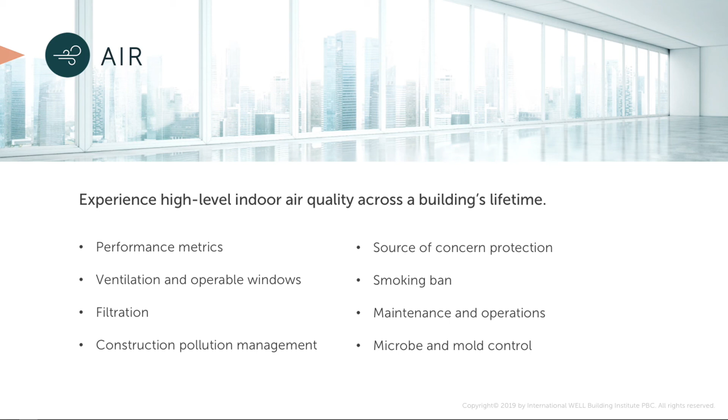Next up we have water. If you're all drinking your 2 to 3 litres of water a day, you want to make sure that your water is of an exceptional quality and that it's easily accessible as well.

And next up is nourishment. This is about encouraging healthier eating options. So WELL-certified projects are required to offer fruit and vegetables within the buildings. And so by removing cues and changing this environment, we're trying to support a change in behaviour.

It's been shown that increased availability of fresh fruit at work sites has been shown to improve fruit and vegetable consumption at work and at home, showing that individuals are taking these healthy habits home with them.

On to the next concept, which is light. Maximising daylight is something that WELL really places focus on. There have been a number of studies that show the positive effect of daylight on health and productivity, and the World Green Building Council reports that focused work increased by 15% for occupants who had window views.

Next up is movement. This aims to promote active living and try and move away from those sedentary habits that many of us have, by promoting movement within the building, providing active furnishings and spaces for physical activity.

Next up is thermal comfort. It is about optimal design and operations of the HVAC system, but it's also about catering for people's temperature preferences. So there's always someone in the office who wears a t-shirt regardless of the weather, right? And there'll be someone else at the other end of the office with a scarf and gloves and a hot water bottle. Not everyone feels comfortable at the same temperature, and an office that is too hot or too cold has shown to cause a drop in productivity of up to 9%.

Second last concept is the mind concept, and the overall goal here is to support and improve the cognitive and emotional health and well-being of those spending time in WELL spaces. It looks at HR policies, mental health promotion and support, sleep support, and help around substance misuse and quitting smoking.

Community is the final concept I'm going to cover today. It looks at topics such as new parent and mother support, providing employees time off to complete charity work, organising flu vaccinations, and also designing buildings to accessible design standards to ensure that everyone can use the building.

A bit more general information on WELL. WELL is global. It's designed to be used by any project. It's customizable and can be tailored to align with the project's wellness strategies and goals. And as we've seen, it has real impact.

Every WELL registered project is appointed a WELL coaching contact. They are the point of contact for the project throughout the whole certification process and are there on hand to help guide the project team through the entire process.

IWBI has developed crosswalks, which are intended to identify synergies between WELL and other green building standard systems to try and streamline efforts for projects who are pursuing more than one rating system. So if a point is achieved in one scheme, it may translate to a point achieved in another as well.

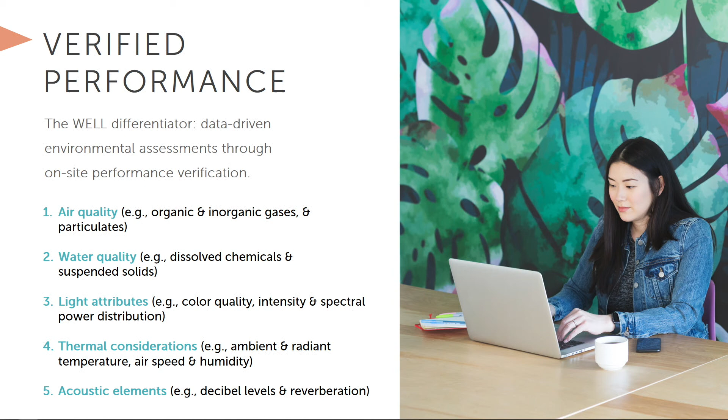Under the WELL version 2 pilot, we've opened up the market to include performance testing agents and organisations, some of which are listed here. They are trained by GBCI and can be contracted directly by the team working on the WELL project. We currently have 35 WELL performance testing organisations globally.

Now I'm going to hand you over to Coen and Marjon to talk more about the performance verification process and their experiences.

Hi everybody, this is Coen, my colleague, and my name is Marjon van Harten. We are from DGMR, a consultancy firm in the Netherlands, and we are WELL performance testing agents.

Today we would like to tell you more about our experience of last year. We followed the course in Paris, and from that day in February 2019 to now, we did 3 projects of WELL performance verification.

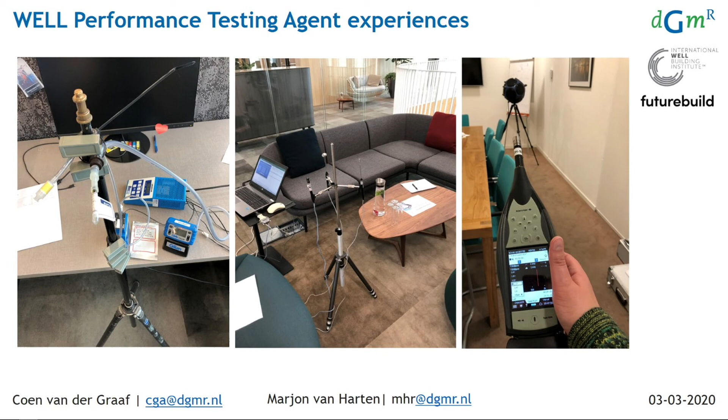Laura tells you more about the background of WELL, but for us at DGMR it's very important that we are a consultancy firm in health environment, and we believe a good environment is also good for people, because we spend more than 90% of our time indoors. Our experience is that there could be a lot of complaints about the healthy environment, and that it gives a lot of stress to people.

So that's why we believe in WELL, that when you design the building very well, it can influence the health and well-being of people. And as you can see, most of the influence factors are the physical and the social environments.

WELL gives a lot of themes to design the building very healthy, like air, water, nourishment, light, movement, thermal comfort, sound, materials, mind and community. Those are the themes, and for the design, every theme has different features, like 14 features for air, 7 for thermal comfort, and 5 for sound.

All those features consist of preconditions and optimizations. Preconditions are features you have to meet, and optimizations are features you can choose for. The good idea from WELL is that you have to choose from all the themes to get a label.

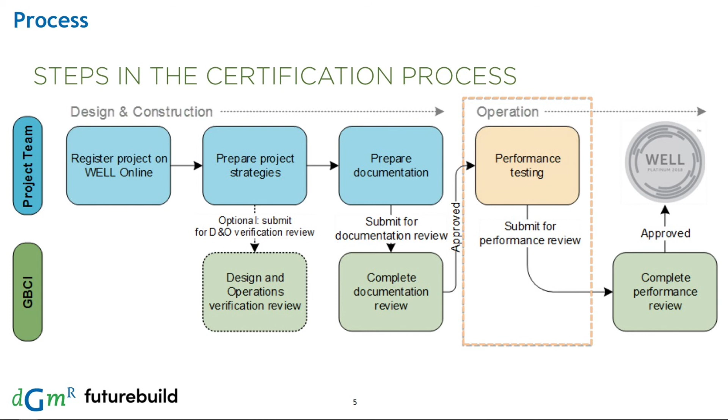In the next slide you see the process of the WELL certification by performance testing. First we review all the documents, and after that we make a plan for the performance testing on site. When we have done all the measurements and spot checks on site, we analyze the results, and when they are all approved, we send the documents to GBCI for a final check, and when they are approved, you get the certification.

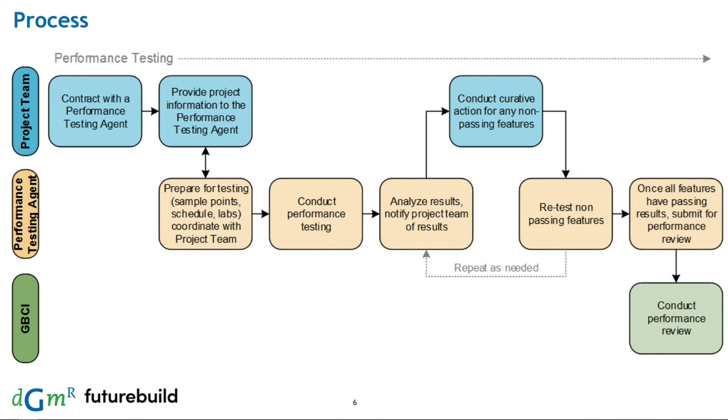But when we think the measurements do not approve the requirements, we go back to the development team, and we have to do retesting until we think the requirements will be met.

All the measurements and spot checks must be done according to the WELL performance verification guidebook, which specifies all measurement heights, accredited laboratories and testing protocols.

And now we're going to tell you what the benefits are of the performance testing and what you have to do.

For air, that's the first theme. You have to measure the air quality for different kinds of gases and particles in the air.

In the WELL Performance Guidebook, they describe how you have to measure, but also how many measurement positions are required. It depends on the project area, as shown in the table. If you have a very large project area, you have to take more measurements. But if your building has more floors, you also have to take more measurement positions.

We measure PM 2.5 and PM 10, carbon monoxide, ozone, nitrogen dioxides, formaldehyde, and 18 different VOCs. Some of them we can measure and analyze ourselves, and others we measure but have to send to an external qualified lab for analysis.

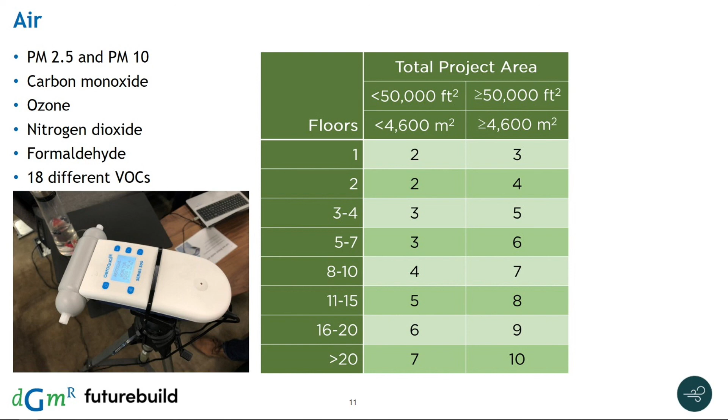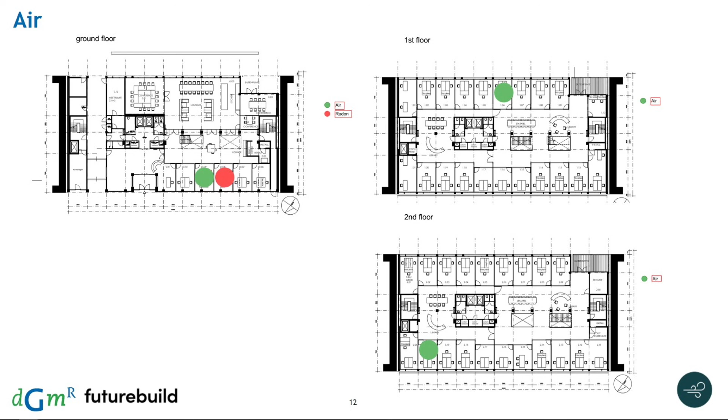GBCI would like to have control of the process, and that's why you have to take a lot of pictures of what we did. We have to photograph the height of the measurement equipment, the measurements from the calibration process, and where the measurement equipment is standing in the room or in the building.

Maybe you ask yourself why it's important to measure the air quality, because we don't see it. But there's a lot of research done in recent years about being healthy in relation to air quality.

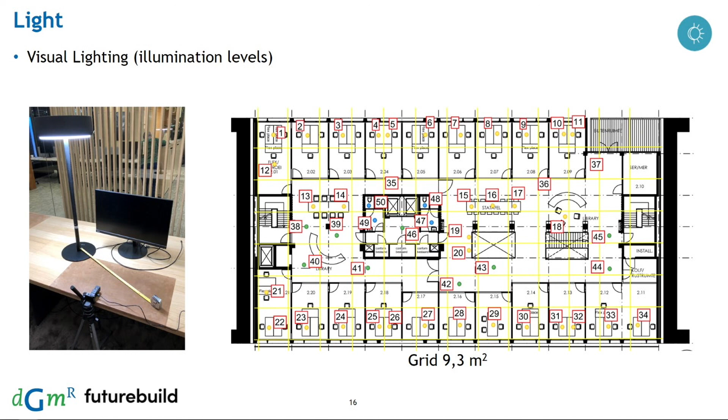For circadian light, that's the light on the vertical plane. So you measure the light that's coming into your eyes, and that is for the day and night rhythm of your life.

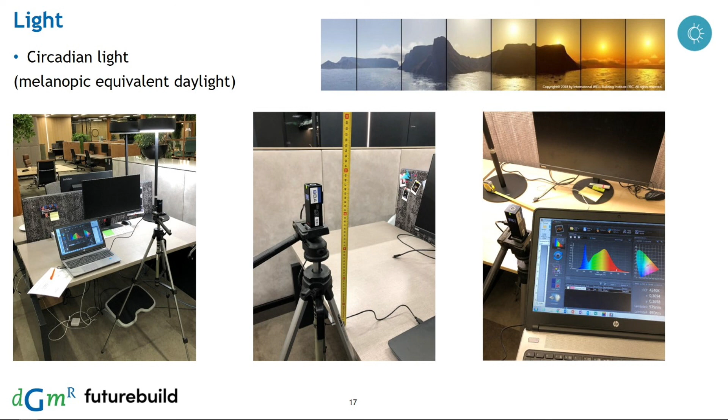For water, we do 35 analyses, which will be done by laboratories. Before we are going to test, we always let the water flow for 30 seconds.

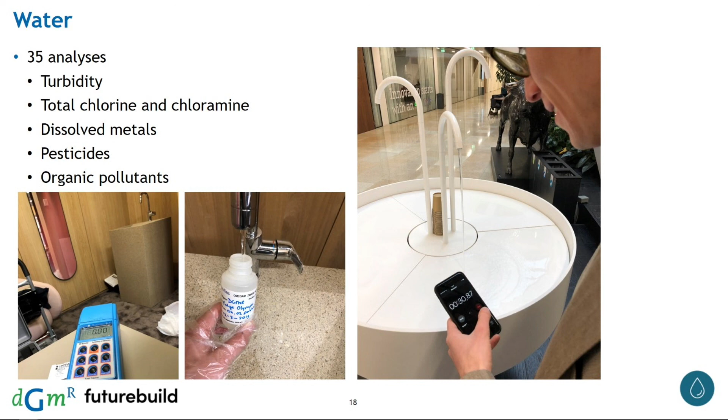In addition to that, we also do spot checks on site. We measure the dimension of the sinks and also the leak detection systems.

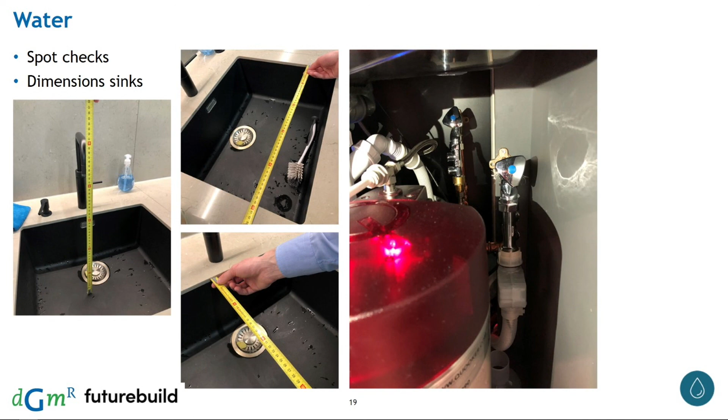For thermal comfort, we measure dry bulb temperature, mean radiant temperature, and relative humidity. This we do for every type of room in the building.

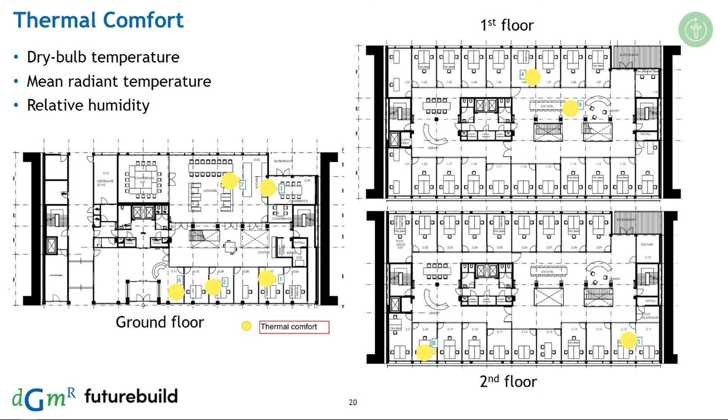We have to make pictures for everything, but we also measure on 3 heights: one for the feet, one for the middle, and one for where your head is. So it's different for standing people and for sitting people.

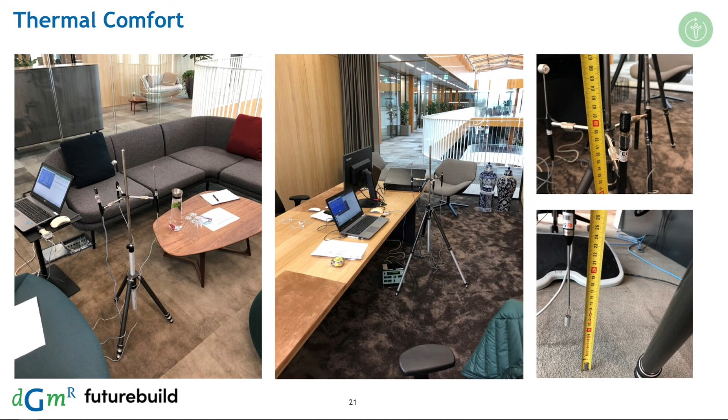As extra, you have to monitor the whole building for the indoor climate. So people are walking in the building, and on every floor you see a screen showing the thermal comfort in the building.

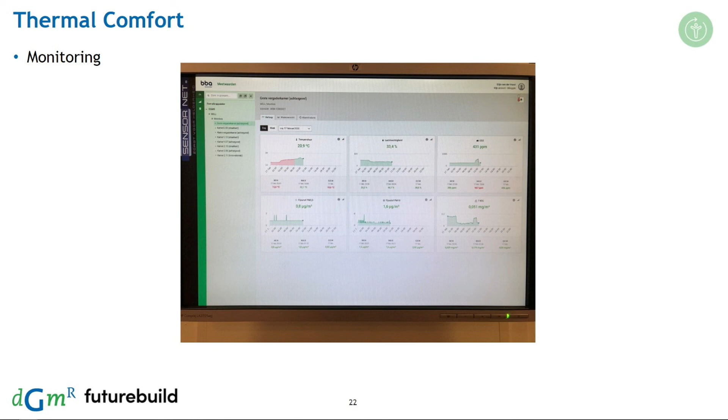One of the last measurements we did are the measurements for sound. These measurements are only optimizations, and consist of the background noise, the reverberation time, and sound barriers. In Europe, sound barriers can be compared with sound insulation.

Sound is very important because a lot of people get stress from too much sound when they are at the office or in school, especially in open offices. That's why we measured in open offices for every 46 square meters, so that every position in an open office has a low level of background noise.

The reverberation time is very important for rooms where speech is important, for example conference rooms in an office, or in a school building, a classroom or auditoria.

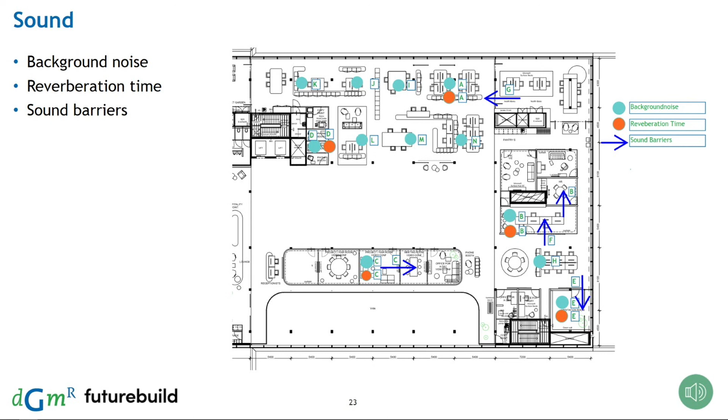And the sound barriers, you can measure all the sound barriers in the building which are necessary for the well-performance test.

I forgot the word, I'm sorry. Every sound measurement equipment has to follow the rules from the guidebook.

Last but not least, we also make a lot of pictures, photos from spot checks, which we don't have to take measurements for, such as community, movements and mind. The area of these spot checks is very wide, you can choose between a lot of options.

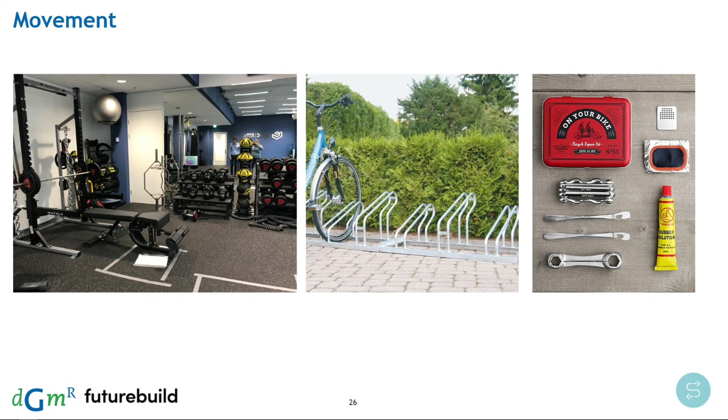For movements in the movement theme, you get extra points for example for bicycle stands or bike repair kits, so the level for going by bike to the office shouldn't be very low.

Last but not least, it's also about food. We call that nourishment, and it's about healthy foods, for example fruits and vegetables.

As well performance testing agent, you also have to check if all of them are on site. But you also have to check if the prepared food on site gives you good information about the food.

What they also would like to see is information and pictures about food which is good for you, like a carrot or a tomato picture. But sometimes you can also think about information about drinking water, for example.

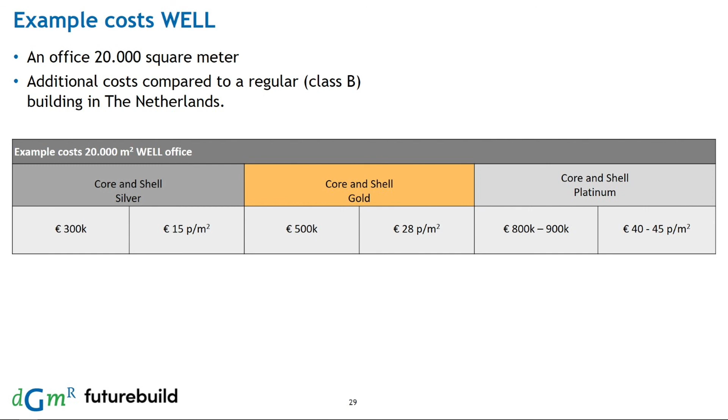For this example, it's an office of 20,000 square meters. For well silver it's about 15 euros per square meter, for gold 28 per square meter, and for platinum, depending on which features, it's 40 or 45 euro per square meter. Now the question is, how much shall productivity improve to earn back the investment of well gold in this example, in 5 years?

In this same example of the 20,000 square meter building for well gold certification, the turnover per employee is 100,000, and the workspace per employee is 20 square meters. When you want to pay back the well certification in 5 years, the productivity must improve by 0.1%, so that's not so much. But when you want to earn it back in 1 year, it's only 0.5% improvement in productivity. This is an example for well gold.

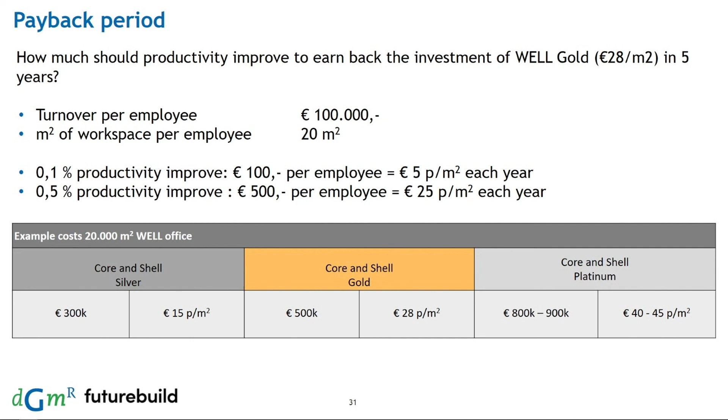Now, how much will productivity increase when you make a better building? I have some examples comparing a worst case scenario, a Class D building in the Netherlands, to a very good building, a Class A building. You see that when you can influence the temperature, the productivity effect will be 4%. So if the payback time target for well gold in 1 year was 0.5%, and influencing temperature alone gives you 4%.

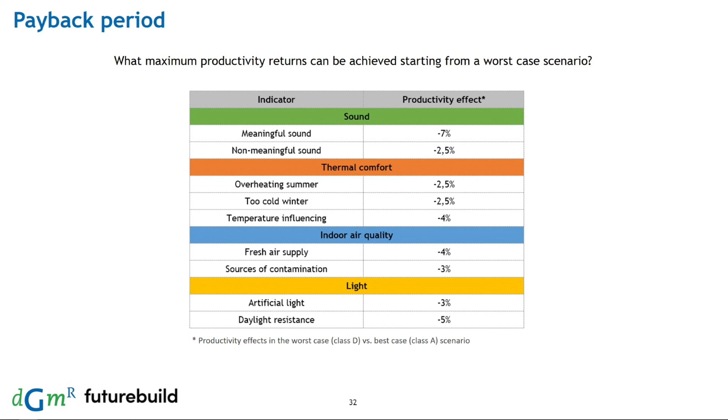I think well is a very good standard, and maybe at first, to start up, it's expensive, but the payback time is very short.

DGMR has also made an app, the Productive Building app, so you can see in your own office what productivity improvement you can get when you change the lighting, the air infiltration, or the acoustics. It's very basic, but it gives an idea of how much productivity you can increase in your own building. At the end of the tool, there are also questions about how many square meters an employee has and what the turnover is, so you can see how much you can pay back.

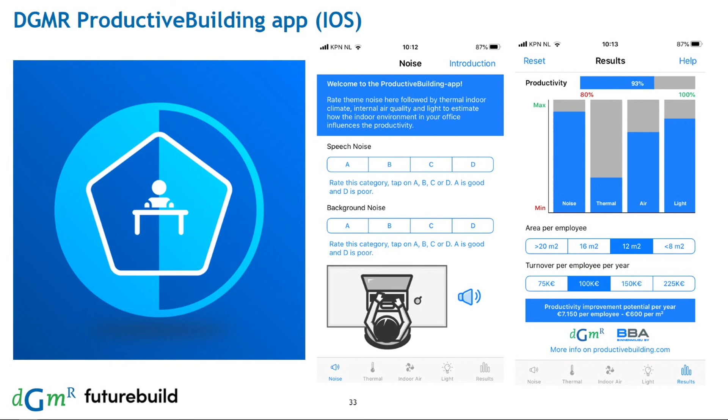Can you hear me? Can everyone hear me? Yes, thank you so much for speaking today. That was really interesting, and the productivity figures at the end are fascinating. That you can really regain that cost so quickly is absolutely amazing. It's a really impactful system, so thank you so much for showing us that. Does anyone have any questions for myself or for DGMR here today? No? Did you guys want to add any last words or anything?

Oh, apologies. Hi, can you hear me? Hi, my name is Ozak. I'm from BRE, the Building Research Establishment, with the Construction Innovation Hub just around the corner. My background is in smart buildings. So where do you see sensors like IoT sensors fitting in with the well building standard? Are there moves towards accepting data from sensors that you deploy in buildings, or for now, is the focus just on the measurements shown in your presentation, done by accredited individuals?